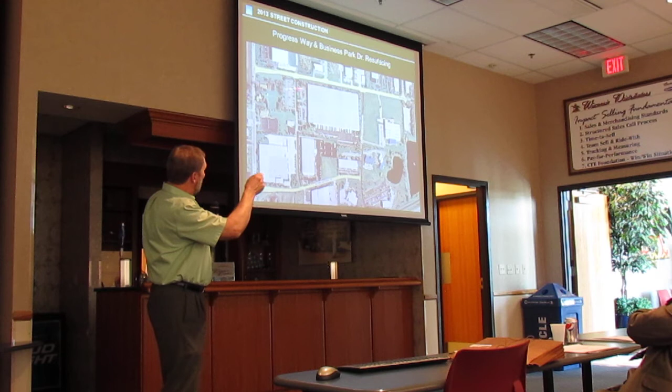Both projects will begin next week, and they're going to start with replacing spot repairs of curb and gutter. That's not going to be too much inconvenience at that point in time. If there's a driveway where we've got to replace the curb and gutter, we're going to provide at least one lane of access so we won't completely shut down any of the businesses out here.

Once the work begins, they have about 35 days to finish it, so it's a project that we kind of get in, get out quickly, minimizing the amount of disturbance. What they'll start with, as I mentioned, is curb and gutter replacement. That'll be followed up after the curb is cured with a pulverizing of the asphalt pavement.

We have a big machine that essentially comes in and turns that asphalt pavement basically into what looks like a gravel. It'll be a black gravel with the asphalt. You'll be able to drive on that yet, but it's not going to be like the finished surface. Once they get the pavement pulverized, reshaped, test rolled, and replace any bad spots that might be in the street, they'll repave that. Again, get in, get out, maybe 35 days worth of work.

Same thing is happening on Business Park Drive. Again, County Truck N right here, Corporate Center Drive goes north and south through the business park. That work will be taking place at the same time. Contractor will be coming in next week doing the curb replacement and hopefully be in and out again in about 35 days. So that's essentially what we're talking about for a broad brush view of the work.

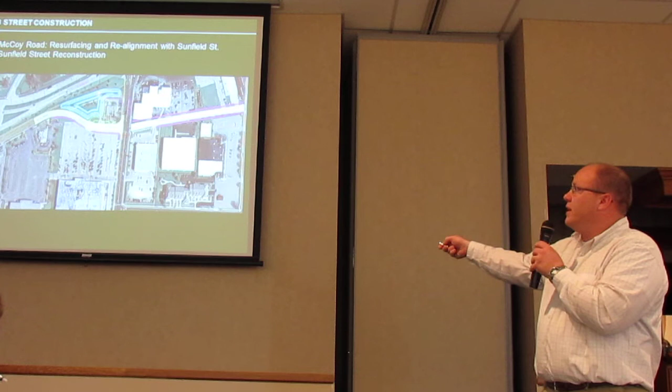The other big improvement we're doing in this area is the pond. We've had some stormwater issues in this area, and what we want to do is try and improve and create some capacity, as you can see right here, in order to help with some of the stormwater issues we're experiencing downstream. So what happens is we're going to cut off the water from Main Street, put it into this end right here - you can see the old McCoy Road right there - and have it stored here, and then eventually it'll come right back into the system and down O'Keefe Avenue. So that's the stormwater improvement element of this project.

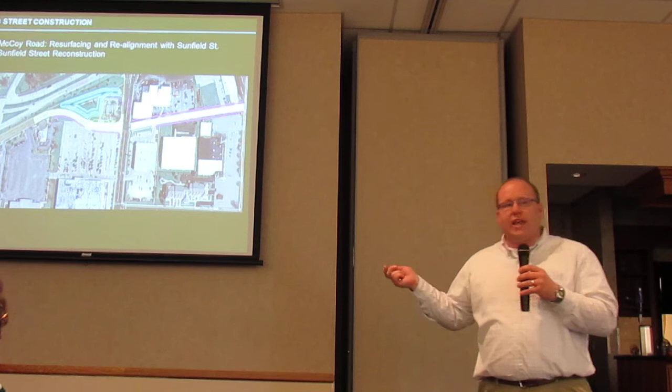The other thing being done is Sunfield Street. Now that we're in the area, we really do not want to disturb it over and over, so we do the best we can to try and get a lot done at one time. Sunfield Street was added in to try and get this completed. The road's in bad shape. It's going to be a full reconstruction, plus some additional things they're putting in.

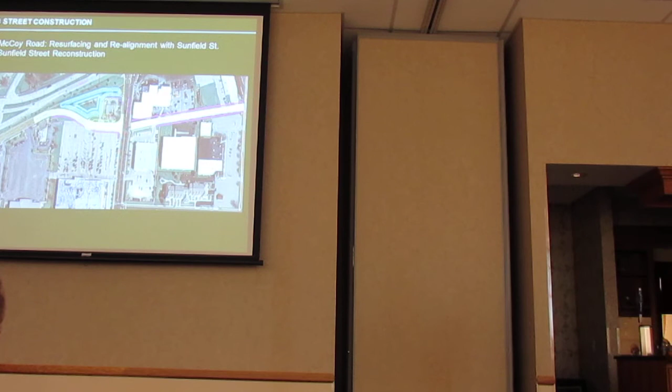Here's a blow-up of the area and a couple things to focus on. Obviously, taking McCoy Road from one side to the other has quite an impact on Super Loop. That's one of the things we had to take into account when we were looking at this.

Here is a new layout for Super Loop that's going to fit in. You can see there used to be that existing large drive that went right into the Walmart parking lot, and the old McCoy Road that used to be their circular pattern, along with the driveway that came right off the entrance to Walmart. With McCoy Road coming in front of them, it's still kind of the same internal pattern they're going to have, but obviously both of their access points now come out here.

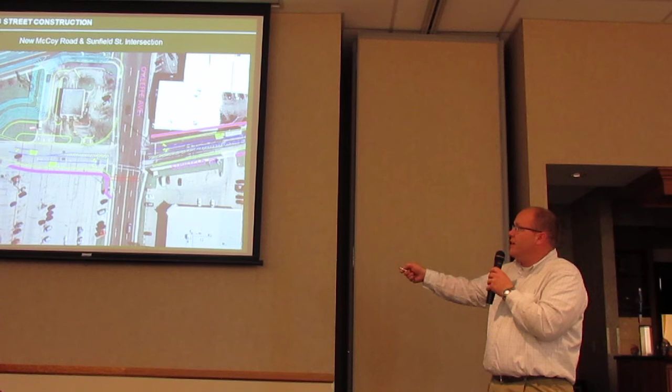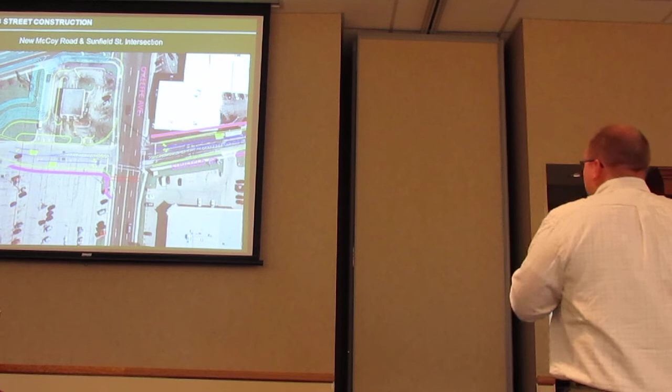There will be no access to O'Keefe, no access to the north. So they'll be able to come in both locations, go around circular, and if they do not go through and get service, they still have a bypass lane, as well as the storage and the ability to do things like that. The other thing we talked about before, to point it out, just to look at both, is the difference in the intersection in order to accommodate the semis.

You can see this is where it used to be, this is where it is. There's a lot of utilities that have caused us issues. ATC has a guy pole right there that had to be moved to make this all work. Super Loop, ATC, and Walmart have been nothing but cooperative on helping us get through this project.

The other thing to look at is that you've got this pond. It only shows a portion of it, but there will be some landscaping improvements along this part of the pond. That's what our intentions are.

We are also, as a city, looking at what we can do as an enhancement to the Main Street side of this pond as well. If there's some signage or some landscaping, those are things the city is considering looking at and preserving the ability to do something either now or in the future. We're just getting into that process, so we really don't have much to share with that kind of information.

Otherwise, you start getting into the intersection. There's a couple of things. Obviously, we have one lane going in with a turn lane that will eventually go into Walmart. You have this area right here that's painted, and that's only to allow more room for semis. They need to be able to pull into that area, yet we don't want our cars to have that much area to get into McCoy Road, but we need that so a semi can make that turn and have that sweeping area.

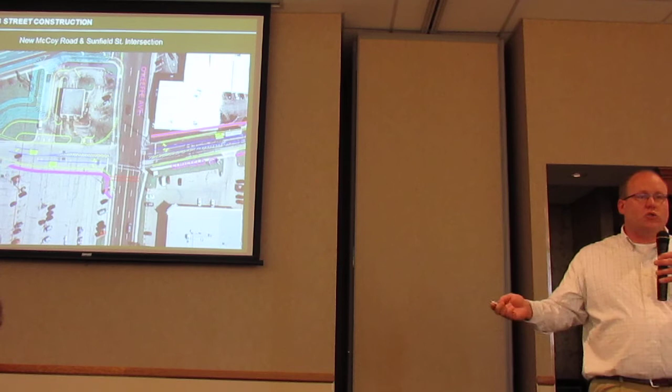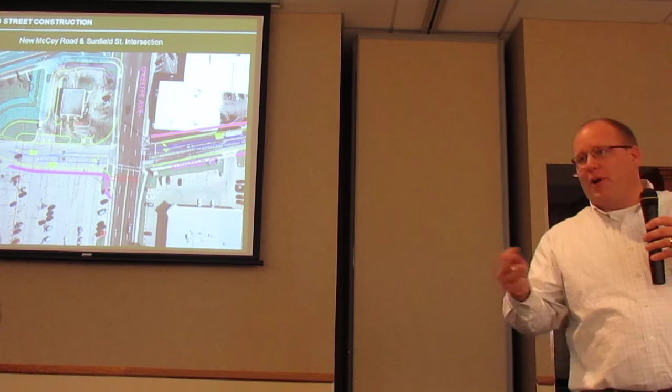Moving McCoy Road is going to help. There's a lot of people who can say they've sat at McCoy Road before or after this median was put in, gambling on making that left-hand turn and getting out. That's pretty common. That was one of the biggest complaints we got.

Moving McCoy Road back is going to help with spacing, but it's not the ideal answer. I mean, obviously we'd love to be able to do a lot more. This is not exactly a 90-degree intersection with Sunfield, but the improvements of bringing it this far obviously gives drivers more time to make that left-hand turn.

Now, the idea was, and you guys are aware of it, that this is only a left in or right in, right out. And yet there's that little slip lane that went over into Stark Automotive that some people might be able to get through if there's not enough traffic. But the idea is now that we pushed you further down in this direction, we can allow this left-hand turn because there's more space to see what's going on in that distance.

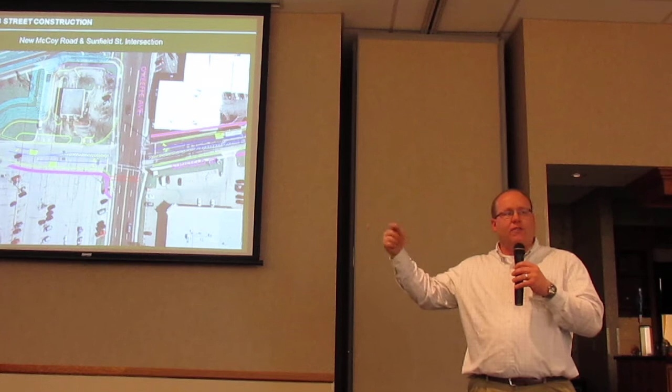The number one question we typically get is, well, are we going to consider signals? Right now our answer is not at this location, because of those three movements we talked about at O'Keefe and Main Street, and how important it is to allow the southbound movement coming from town heading south. We're looking at signals in the future at Linnerud Drive, where the main entrance of Walmart is going to line up, and that's where we want to push traffic, because here there will always be the ability to have the left turns and movements we show, but we see that as the bigger intersection that's going to have better spacing from Main Street in order to time it.

Now looking at Sunfield Street, the other thing shown is that we do have sidewalk improvements. What we're proposing on this side is sidewalk along the south side, the Walmart side of the project. There's really no reason to have people walking in this area, and we have a sidewalk that eventually leads over to Taco Bell and then underneath 151 and out to the west side.

So we want to keep that consistent. But when we get to Sunfield Street, that's one of the biggest improvements we're proposing — sidewalk on both sides. As you can see, it picks up right past the first business and heads all the way down past the bowling alley to Claremont, same thing on the north side. Now, I know Stark Automotive — I don't know if he's here or not — the sidewalk is not going through his building. So just to make sure we explained it, they're fully aware of where it is, but it's not through their building, that's just because of the aerial.

Otherwise, it's a full reconstruction. The road is going to be at our maximum width that we have in our community, 39 feet. Again, this is a big road that helps out with a lot of the trucks that come through, but the time to do it was right now, which helps out with getting this area taken care of.

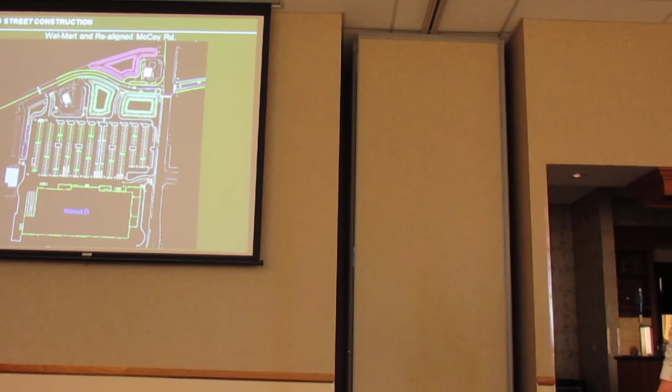Now let's see how this all ties in with the Walmart improvements being proposed. You've seen it out there, the fact that the old Pick and Save is coming down. This is how it all ties together and what's being proposed.

There's going to be three ponds in total when you come off of McCoy Road, two of them for Walmart. Walmart's site is now going to drain towards these ponds — they're really going to reverse direction and come towards McCoy Road, towards our pond, where all the collection is going to be. On the top side, it's the same thing — that's where our pond is located, so that's where all the stormwater is collected and then routed through the same pipe that comes down O'Keefe Avenue to the south and ties into past city projects that have improved over the past couple of years. Actually, it's been worked on since the 2008 flooding. So those are all things that have been laid out that we're working on.

Otherwise, it still has a couple of entrances. Obviously you see the new store, and this is the existing Taco Bell. You can see with the new road alignment that comes through, there will still be an access point just past Taco Bell, kind of like what the old Pick and Save Taco Bell driveway used to be — so there isn't much difference. There will be one right here that was shown before, but it's going to be like a throat, giving the ability to have some stacking distance before it gets to McCoy Road, before you enter the large parking lot that will encompass everywhere from Taco Bell all the way over to O'Keefe Avenue. So that kind of shows it together.

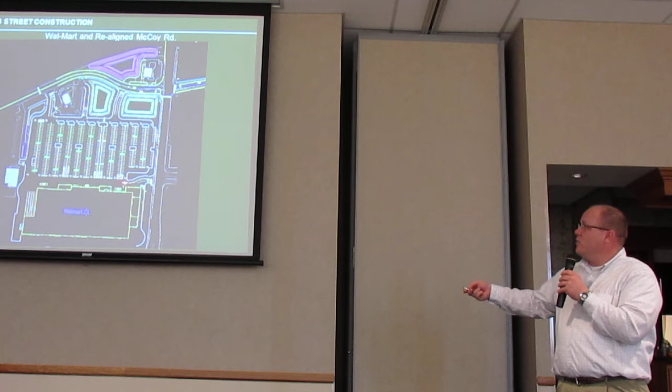And then here you can see the Linnerud Drive intersection, where we've lined it up so that the intersection lines up across from that, so eventually signals will probably be considered.

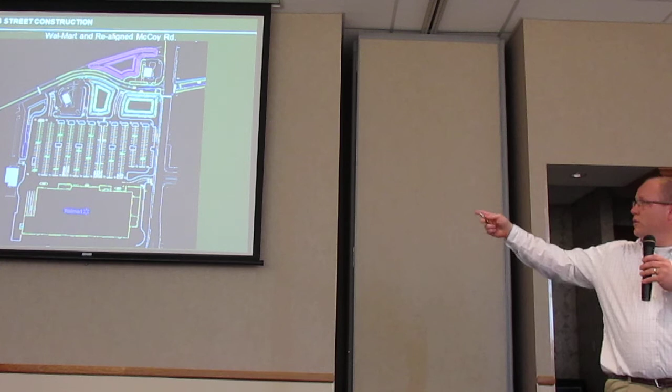How soon will be will all depend on how the traffic reacts with the new store opening. The only other thing is that there will be some connections coming across the parking lot into the adjoining property owner. With our project concern and the timing, we're working at looking at doing this project yet this summer, late summer, early fall.

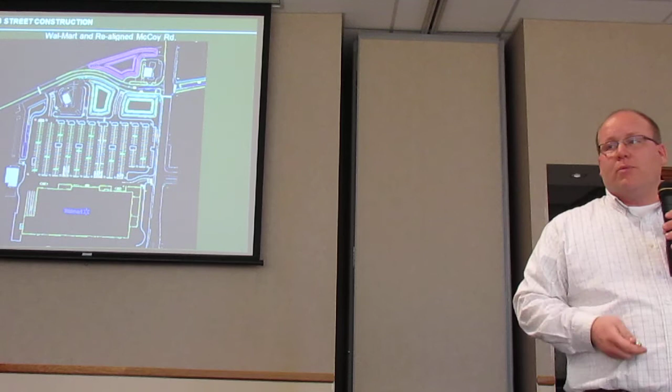So with that, I think I've covered the project for Daryl and I, and any part of the city part, we can answer questions now or at the next point. Otherwise, we'll turn it over to you.

One question - I'm glad you're thinking about landscaping those ponds, because it's an area that's a Sun Prairie entranceway, and sometimes those things become trash pits in some cities. So it wouldn't be a very good thing to look at coming here. The question was asked about landscaping - it's a good thing that we're looking into the landscaping because of the concerns with trash and garbage that collects in these areas.

There are some differences between the ponds, and we're doing some things hopefully to eliminate that. It's planned to be a wet pond. The issue is that it's going to be kind of hard to see - it's kind of deep into a hole, so we really want to improve the outer perimeter of it rather than focusing on what's down below. We are putting in some decorative rock for the riprap, not your standard stone. We're going to use some type of colored stone to make it look better.

One of the things about Walmart's pond is that they do have a fence requirement. They will have a fence around it, and the city's worked with them on what type of fence to install. Otherwise, the trees and landscaping being proposed are obviously being installed in order to shield and protect the ponds.

The whole Main Street area, that's up for discussion. There are so many options that we have up in that area, but that's something the city department is working on - whether it will proceed this year or we just make sure we preserve the ability to do it in the future.